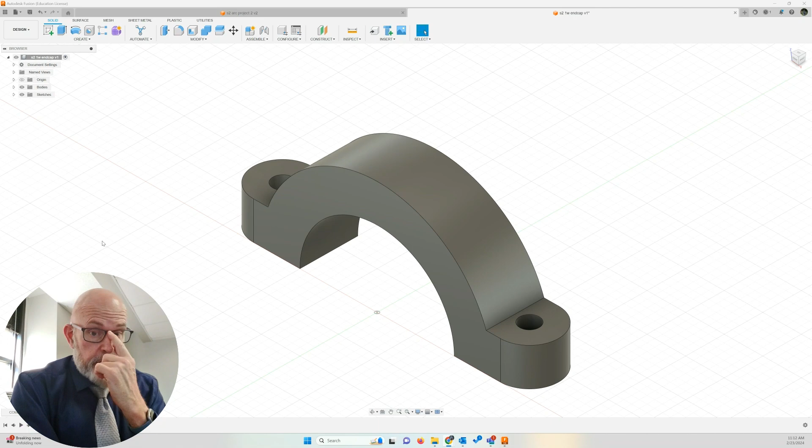Okay, today we are doing our first project with the ARC tool, and this will be the end cap to the crank arm we just created as our project from the circle tool. As we discussed when we created the crank arm, we used circles to create the bottom portion of the design and trimmed away the excess that we didn't need. What you're going to do when you get to this project and working from dimension sheets, you're going to do it more similar to what we're doing today, using the center arc tool.

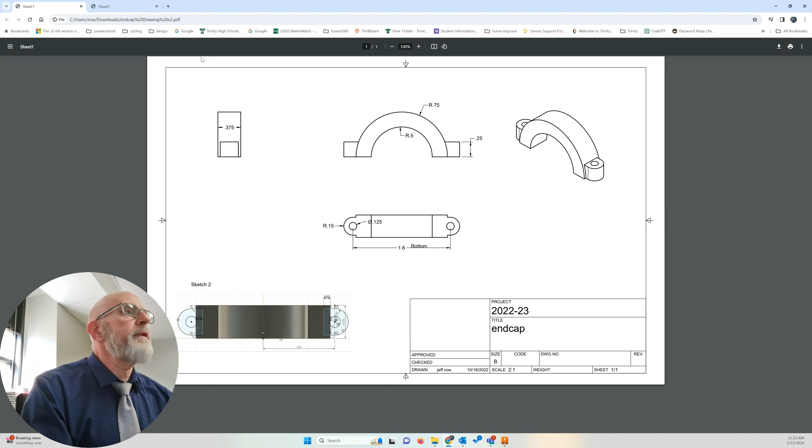Let's bring up the dimension sheets real quick. All right, this is the actual project for the end cap that we'll be doing later in the semester when you are doing the engine block project. So you can see there's my design. What we're doing today is very similar, not quite the same, but very similar.

So we're going to create a sketch on the front back plane. Our origin is going to be right here, the center of our design. First, we're going to change our units of measurement to inches. That's not stated on here. The other thing not stated that appears to be left out is this extrusion will be a quarter inch tall. So we're going to draw two arcs in our first sketch.

The first arc is going to be 1/2 inch. The second arc will be 3/4 inch. Now we could add this up with a different height of extrusion and extrude it back. Well, we could do that, then put holes in the top. That would be a possible approach, but not the way we're doing it.

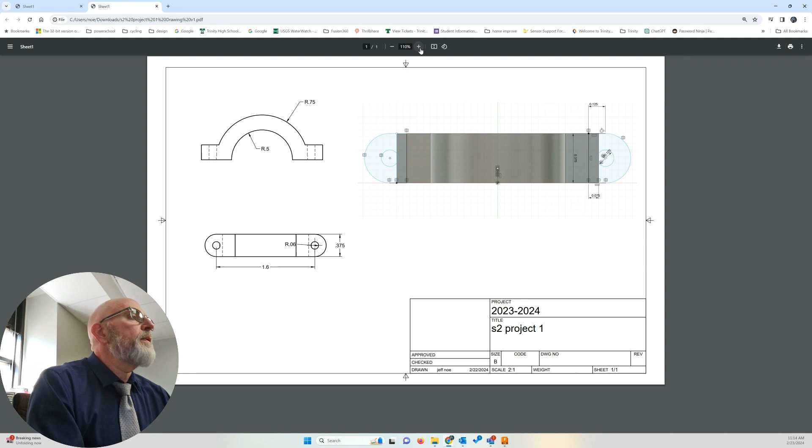Okay, so we've got two arcs. We're going to enclose those two arcs by drawing lines across the middle. Then we're going to come over.

We're going to create a sketch on the bottom face of our design. We do not want the plane. I had 3 or 4 guys in class last time I did this select the plane, and they can't access these edges. They're going, I can't dimension from the edges. Well, no, you can't dimension from the edges because you're sketching on the plane and not on the bottom face of your design. So create a sketch on this bottom face.

We're going to draw a rectangle, an eighth of an inch by 3/8 of an inch. We're going to start on the top edge of our design here, not on the corner, because we don't want to tie this rectangle to the corner. And we're going to create a sketch dimension. We'll use 0.075 plus 0.05 which gives us 0.125, an eighth of an inch. So we can either position the right edge 0.05 inches from the right edge of our design, or the right edge of our design 0.075 inches from the left edge of our rectangle.

Then we're going to create an arc from the right top corner of that rectangle, and it's going to be a tangent arc, tangent because there's a tangent constraint on this particular arc.

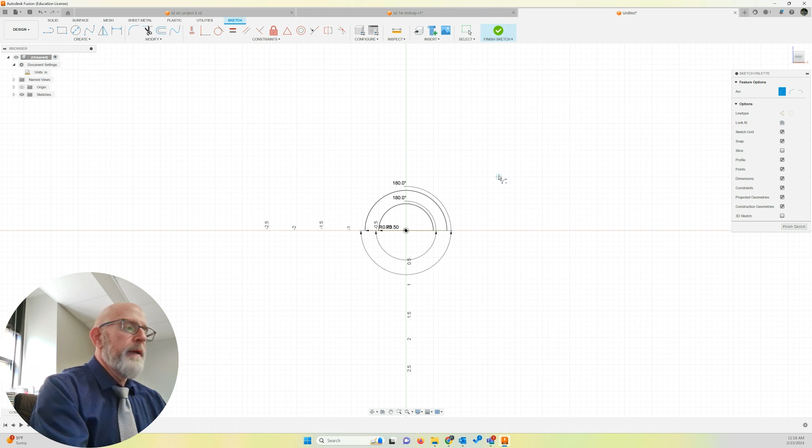It's a little messy because of my dimension lines, I'm going to drag those in and out of the way. There we are, and I've got my 2 arcs.

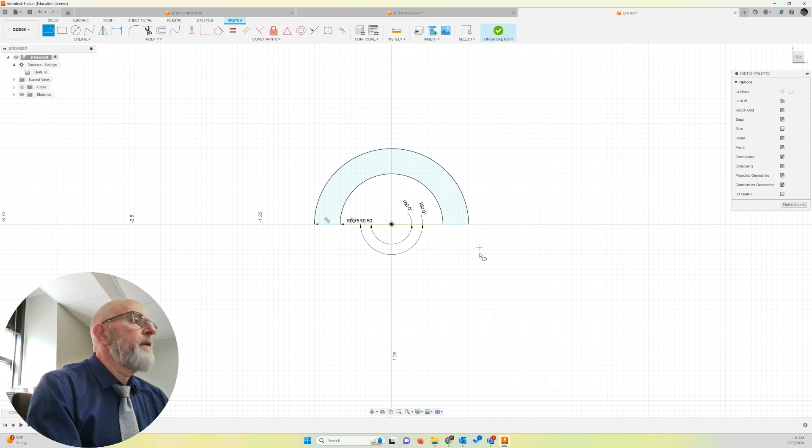Let's take the line tool. We want to enclose our shape here, so line tool, create line, keyboard shortcut of L. Endpoint of the outer arc to the inner arc, there's 1. Let's do the same on the other side, inner arc to outer arc, there's 2. It's turning blue, I've got an enclosed shape. Let's finish sketch.

Let's extrude. Keyboard shortcut of E. Home position.

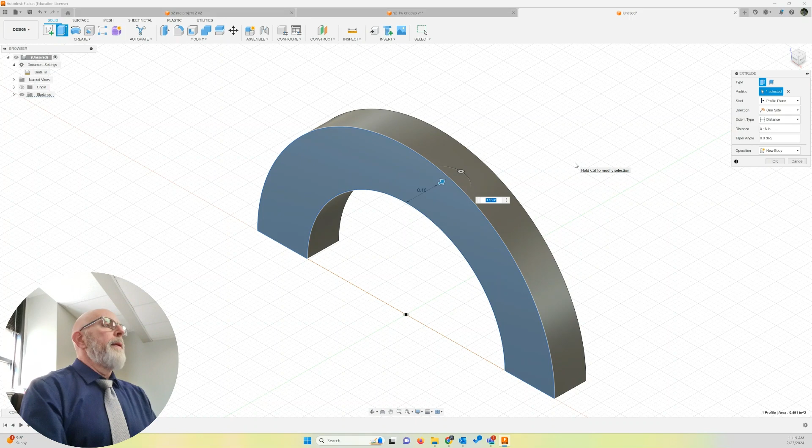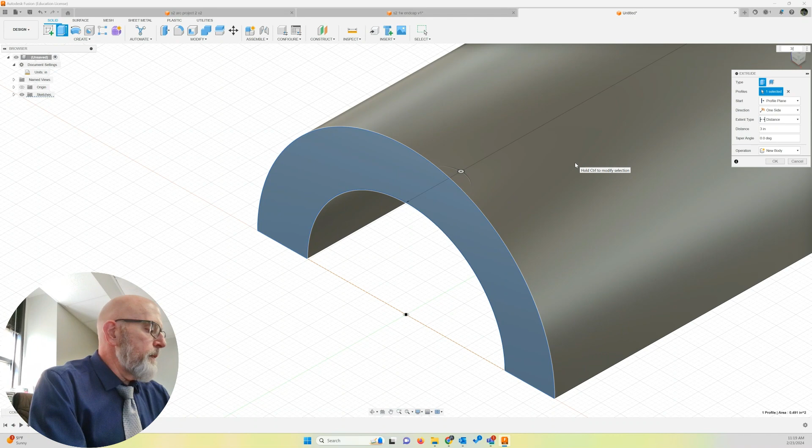All right, it's 0.375 inches or 3/8 of an inch. Now, we haven't done this yet in class, so I'm kind of shocked we haven't done this. If I had given you 3/8 of an inch as the dimension, how do you convert that to a decimal? Well, it's 3 divided by 8. So I can type in the fraction, 3 divided by 8, and it will do the calculation for me. And there we are. So if you see the dimension box, it's 3 divided by 8, which happens to be 0.375 inches.

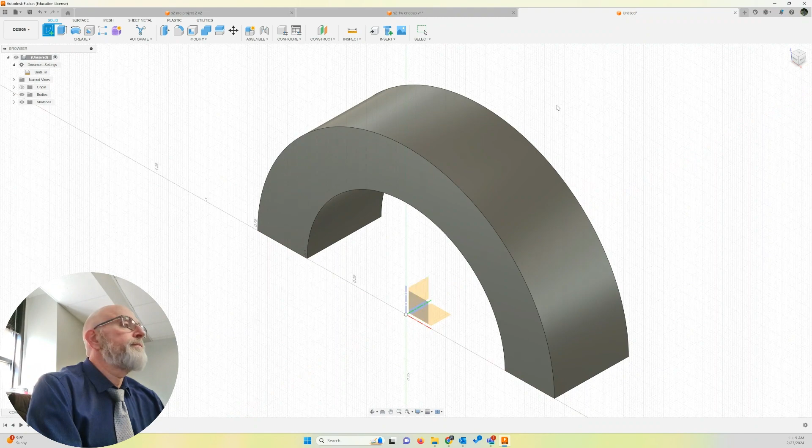Okay, I'm going to enter as a new body. Now we're going to create a sketch. We do not want the plane, I harped on that a few minutes ago. I want this bottom face, so I'm going to click on that face. The reason is because I want to be able to access the geometry of my design, or the edges of my design.

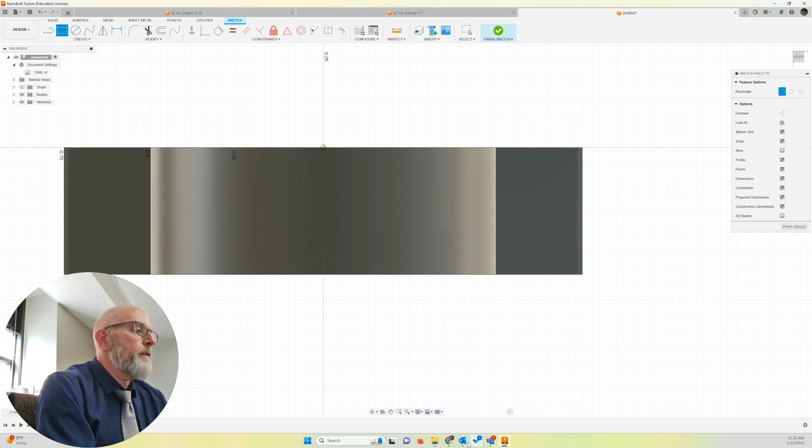Let's create a 2-point rectangle from the top edge. Let me refresh what we're doing. So we're creating this rectangle, 1/8 of an inch by 3/8 of an inch. We're going to position that rectangle to this edge, either 0.075 from this side to here, or 0.05 from this edge to the right edge. We're going to create a tangent arc from the endpoints and then create our 1/8 of an inch diameter hole. And we'll mirror it to the other side.

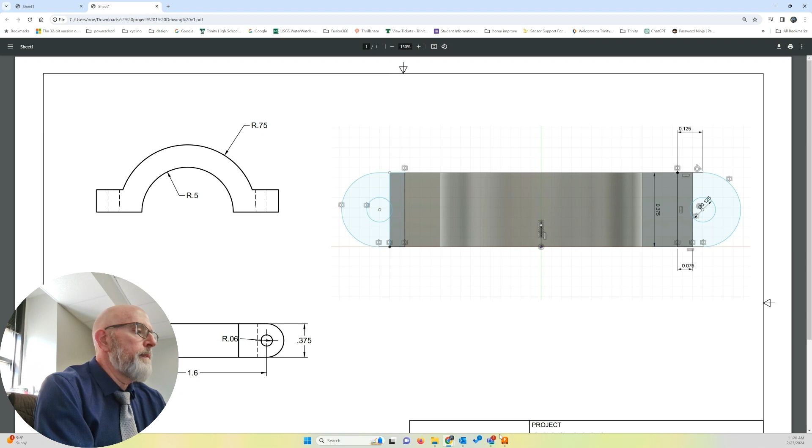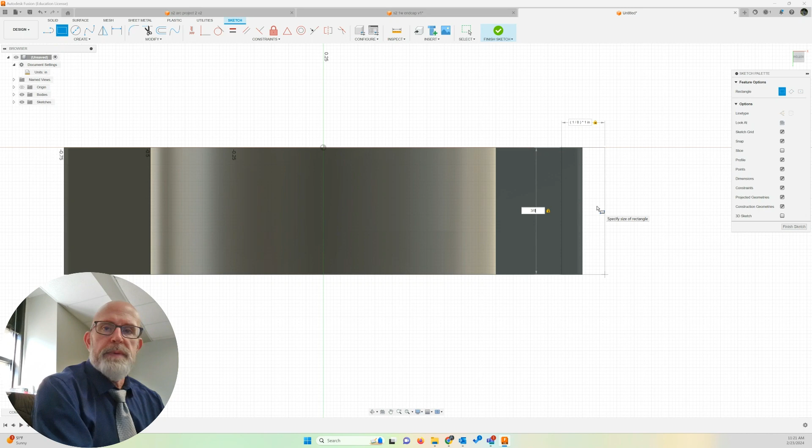So let's draw our 2-point rectangle. I'm going to start somewhere on the edge, top edge here. 1 divided by 8 by 3 divided by 8. Look at there, works out, I was right. Okay, so it comes up 0.125, 0.375.

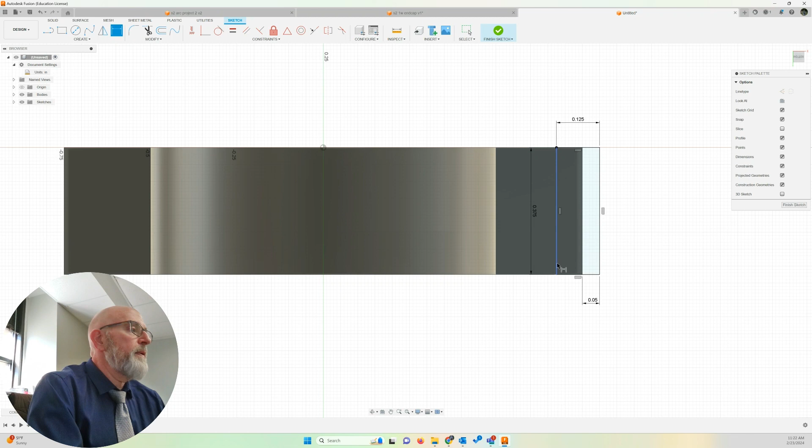Let's position it. Sketch dimension tool, create sketch dimension. Let's go with the right edge of my design to the right edge of my rectangle. Now, the diagram showed left edge of my rectangle to the right edge of my design with a distance of 0.075. Well, guess what? 0.075 plus what gives me 0.125? 0.05. So I'm going to dimension this 0.05 from the right edge. Okay, that means from here to here is 0.075.

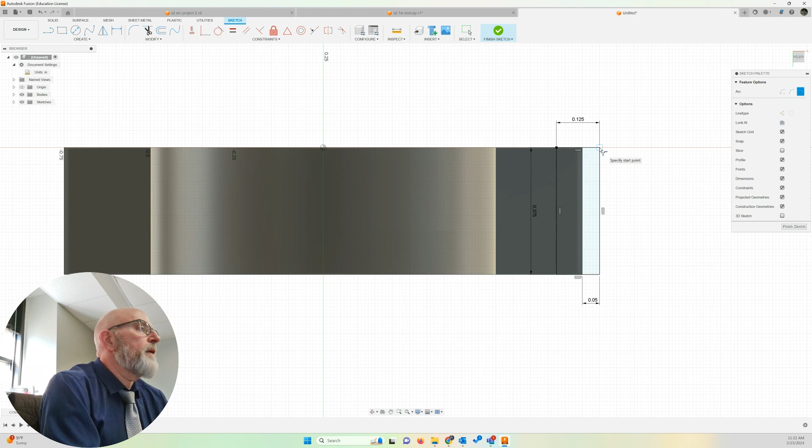All right, let's create the tangent arc. So the tangent arc is 2 points, our 2 endpoints. There's going to be the first endpoint, second endpoint will be the bottom. Create arc, tangent arc. First endpoint, click. Second endpoint, click. There's my tangent arc.

Now we'll create a center diameter circle. Create circle, center diameter circle, keyboard shortcut of C. From this midpoint, which happens to be the center of my arc, there we are. There's the center of my circle. 1 divided by 8, 1/8. And enter. Look there, worked again.

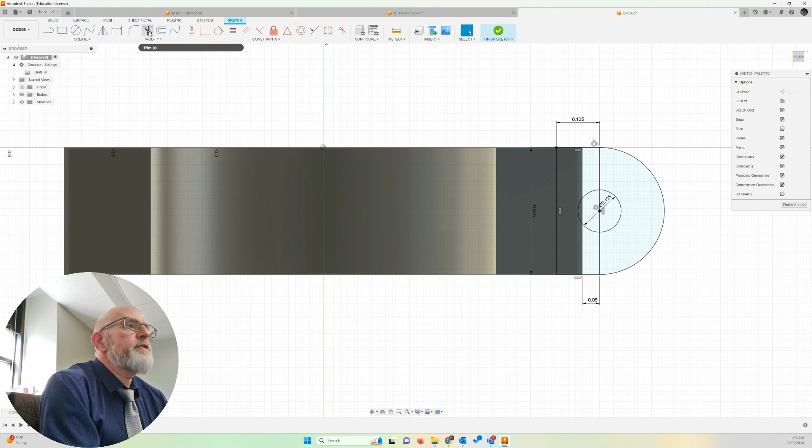Okay, we're getting close to being done with this side. Let's just trim away some of the excess. So modify, trim. Let's get rid of this, and this. It's the closest I'm going to get to one enclosed shape.

And now I think we're ready to mirror, other than the fact that we need a mirror line. Let's go create line. Create line from the origin. Click. Straight down. That was the center of our design, right? Click. Escape out of the line tool.

I'm going to select the line, hit X, and toggle it to construction. I very rarely actually use the button on the sketch palette to toggle construction because I never remembered to turn it back off. So I will create my line, select it, and use the letter X to toggle it back and forth from construction. Okay, let's mirror.

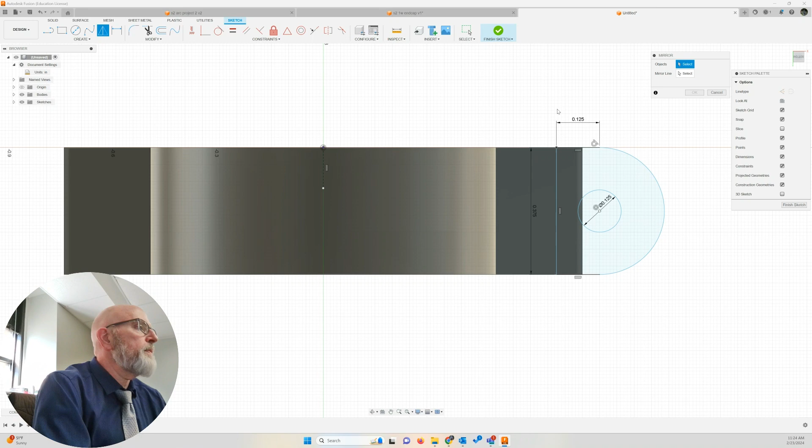Create mirror. Here's the shortcut in the toolbar. I'm going to move my palette up out of the way. The first thing I need to do is select the objects I want to mirror. I'm just going to click and drag. There we are, I've got 14 objects. Let's change the selection to select the mirror line. There's my mirror line. Oh, it looks good.

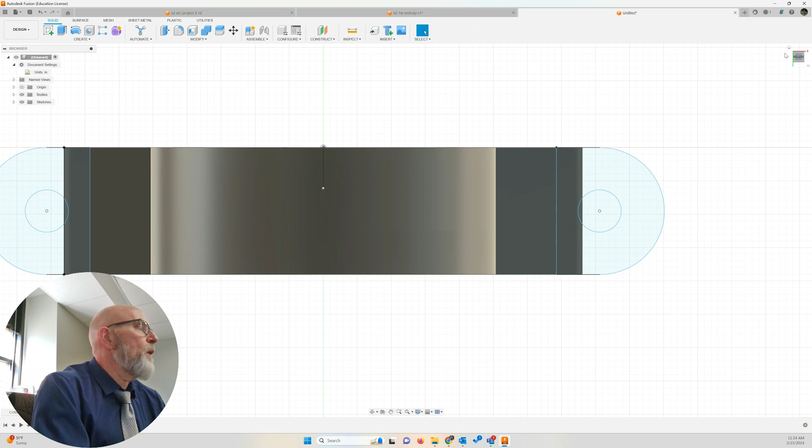All right, everything's in place. I can finish sketch. Let's finish sketch, home position. Could just hit E. Let's extrude. Create, extrude, keyboard shortcut of E.

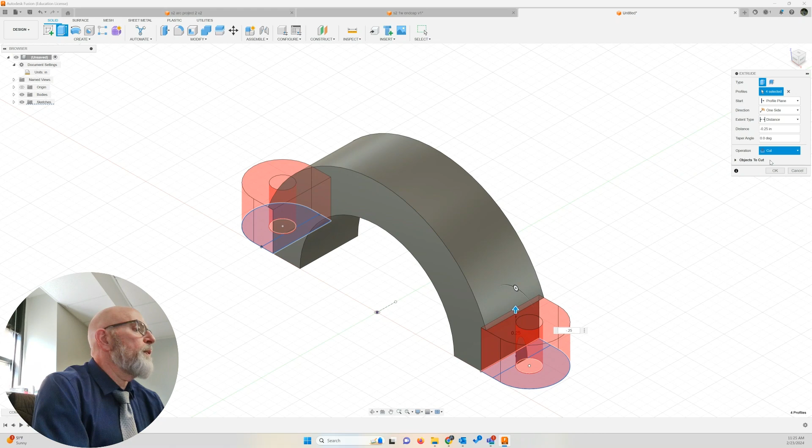Select my shapes. There's 1, 2, 3, and 4. We're going up, negative 0.25. I don't want to cut, so I'm going to change my operation from cut to join. Looks good. Let's click OK.